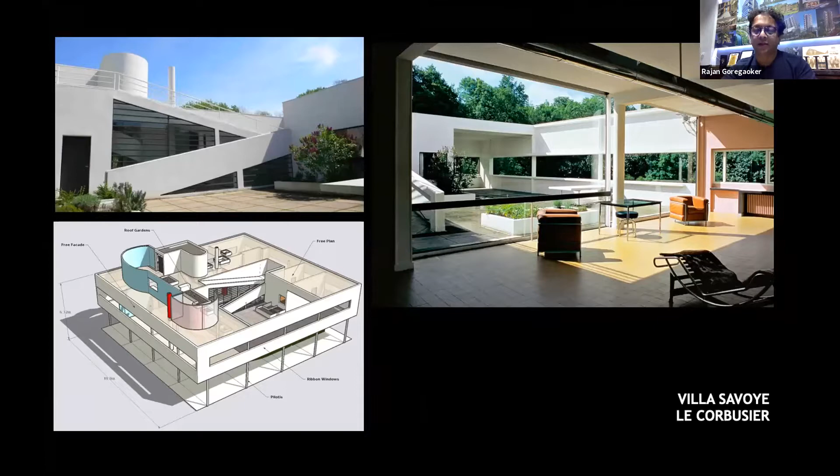So going ahead, after seeing this kind of work, I'm sure everybody, all architects, were inspired to do great stuff. We also have used some kind of ideas and thoughts in our houses, and I'd like to share them with you with some of our work.

Now I'd like to talk about transition of spaces. Transition of spaces is actually a concept which is not new. If you go down history, you'll always see a lot of old forts and Mughal architecture, or a lot of historical palaces which have courtyards and corridors, which play the part of creating a transition from one space to the other. I think that's done so that the entry and the destination create some kind of transition in between them.

We used this kind of idea in one of our projects, and I'd like to show you how we've done that. There was a plot which is around an acre in size, and we were permitted an FSI of only around 4,000 square feet.

So it was a small house, actually on the edge of a mountain, so you can see the valley beyond. Instead of just constructing a bungalow or villa, taking 10% of the area and just locating it at the edge of the plot, we thought, why not create the entire journey from the entrance to the destination, and create an experience while we do that, because we have so much space to do it.

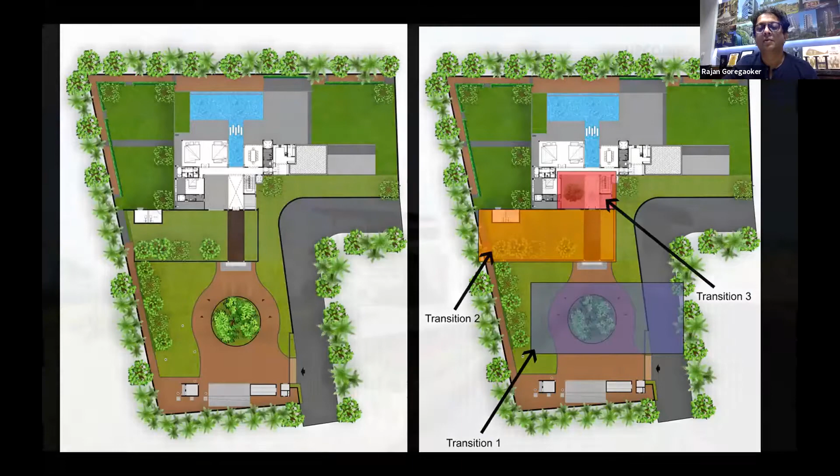This is what you see when you enter the house, when you're driving into the land, and when you see the house, but you don't really see the magnificent view which lies in store for you. What you actually just see is a screen wall, and you experience a space with a beautiful landscaped entry, but you don't see the view you're going to see from the living room. This gives you a sense of mystery and curiosity, which is another very important element in design - if you can create it, it really brings out the anticipation of what is ahead. So here you are.

From there, you move on and walk down a corridor. So what you actually entered from was a notional entry, not a real entry. But you walk over a corridor where you experience another landscape, another kind of light and shadow experience.

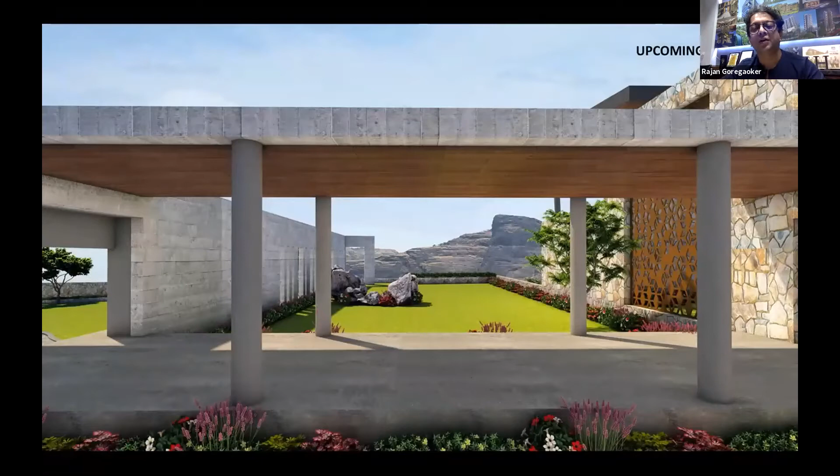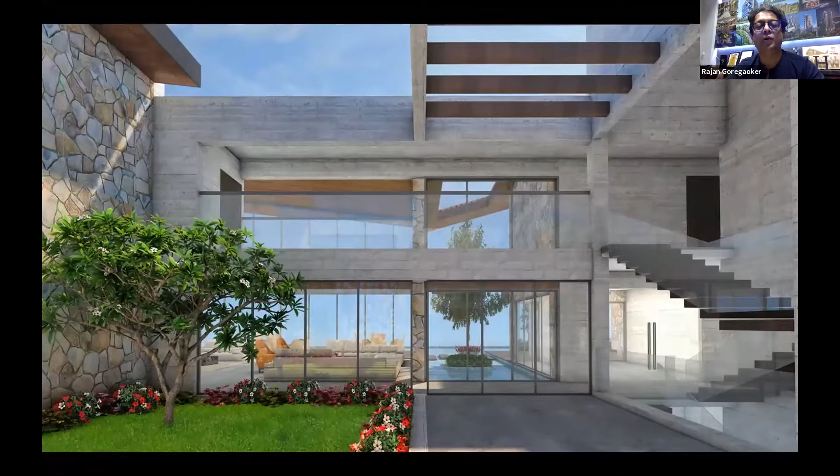A different kind of biophilia all around you. After you walk in and enter the main door, you enter another small courtyard enclosed by walls but with a skylight from the top, so you get natural light. Each space is actually a semi-outdoor space, and it closes in more and more as you reach your living room, preparing you for what is ahead.

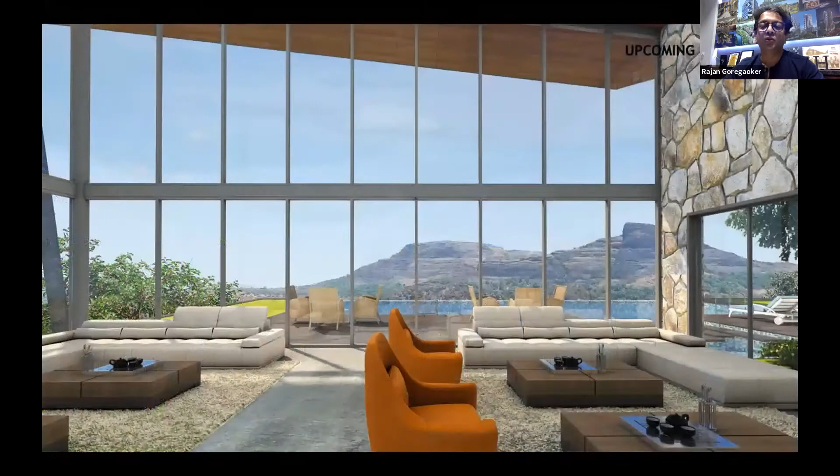So this is what you finally see when you reach the living room. Instead of making a house where you just open the door and go straight into the living room, we've created an experience right from the entrance to your destination.

I really like the Villa Savoye example that you used here—very influential building of the 1930s, and there's been a lot of imitation. People have tried to emulate that building all over. Phenomenal project—I think it set the trend for modern architecture after that, and it was just path-breaking. Absolutely, it was at the cusp of evolution at that time.

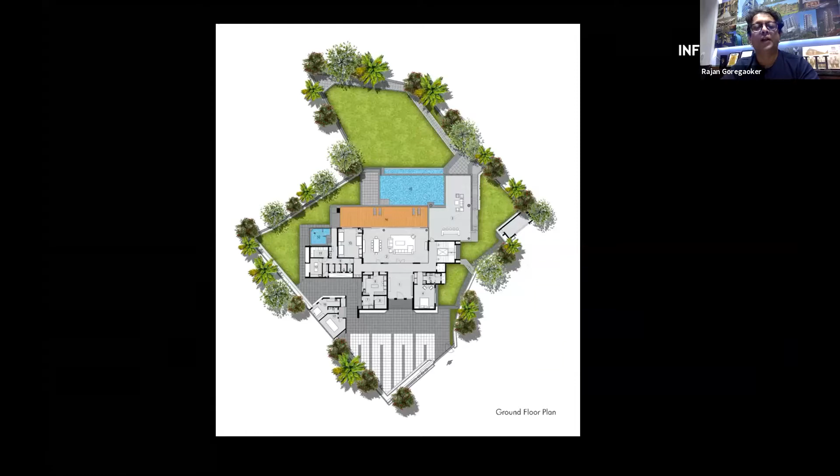The entrance here—you really can't tell what lies in store ahead. Using mystery and curiosity in design is very important. When you see the house from the front, you don't know what's in store; it's a pretty plain facade. As you walk into the first lobby, with the skylight on top, you can see in the background a water body, with the water touching the landscape behind.

And what we did was we made this entire place focused around the swimming pool. On one side, we've taken this large portal, creating this violation of the human scale. It's around 30 feet in height, and it envelopes the entire geometry of the house.

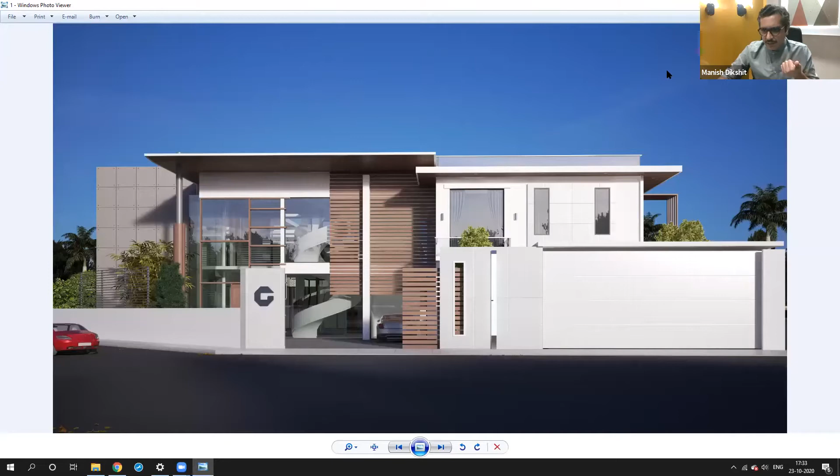So I hope my screen is seen now by everyone. Yes, all right. So this is one project which we designed in Dubai.

It's in the final stage of construction, pandemic delayed it right now. So the whole idea about this project is this is in a very upscale neighborhood of Dubai where you have all villas which are quite traditional in terms of Dubai standards, with an Islamic architectural influence in them.

One of the criteria given to us is we needed to use the color gray and a sandstone finish on the walls, which we tried to implement by blending it with the concept of the whole house, which was quite in the contemporary lines, managing the climatic condition of Dubai, which is very critical.

So the use of glass - I know Esra will be very happy when I'm talking about glass right now - but the use of glass in that right location with the northern light that we try to get inside the house ensures that we eliminate the use of too much artificial air conditioning and artificial support of your climatic condition inside the house. So that also is equally important when we try to design most of the building.

I think most of the architects here will also agree. Many times we tend to fail when it happens to be a project in a congested urban town like Bombay, because we don't have that flexibility when it comes to different directions of light that we can take inside our project.

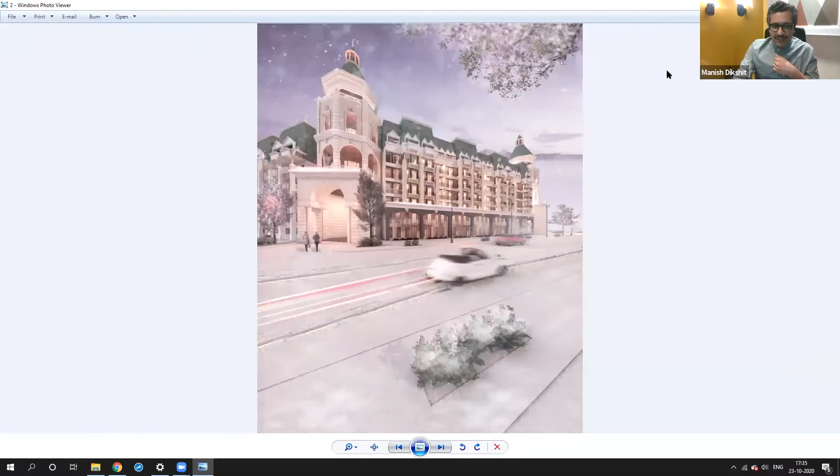This is a second project which we designed in Moscow. So again, completely drastically different from the earlier one, from that hot Dubai climatic condition to the extreme cold that we need to tolerate and bear. So here it was the other way around.

We needed to use maximum light and maximum heat, which needs to be penetrated inside the house. And another key feature here are the balconies.

Balconies also play a very important critical role because we need to understand the amount of dead weight that the snow creates on the balcony. So to ensure this snow does not cause unnecessary structural damage to the building, we need to ensure that the balconies are sufficiently covered so that direct snowfall is minimal in these kinds of scenarios.

Also, one key important factor is the roofing pattern and the shape of the roof. To understand the amount of snow that a place like Russia, Moscow here, gets throughout the year, we need to balance it out perfectly with the condition that you generally face.

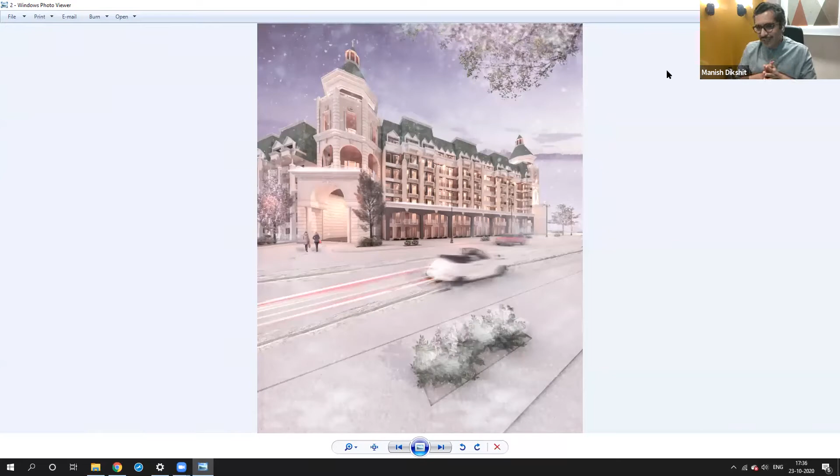The key element about this building is that it was Chola-inspired architecture. This is something we tried, contradicting what I said earlier about geographical location versus structure. This is the best example of that. It's located in a place called Matunga in Bombay, which is next to all the South Indian Dravidian temples, and the flower market around it.

So it had a lot of character in that vicinity. What we tried to do is let it merge with the surroundings rather than being an eyesore or just a structure standing as an uncomfortable view for people passing by. In fact, the good point was the next door structure was a temple itself, so right from the colors of this building, we tried to blend it with that, and yet it has got its own statement when you look at the building.

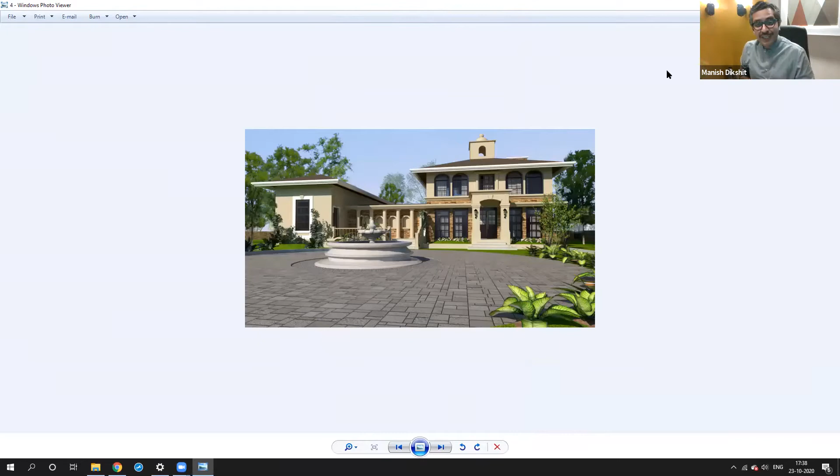This is again a very interesting project, now in the center of India. This is almost 150 kilometers from Jabalpur, almost the center of India you may call it. This belonged to a client of ours who is based in the US, and he stays almost 9 months of the year in India. So he wanted his house in India to feel more like how he would be in the US, adapting landscape elements for this project to handle the harsh summer months, which are very uncomfortable in this zone.

So we created in advance, before we started the structural work, pits around the whole project so that natural rainwater, which is minuscule, was being absorbed into the soil, and it gave rise to local flora around it. This helped us create all the greenery that you see here. Right now it's even much more than what you see in our 3D renders.

So the whole blending and styling of the structure went with the whole concept of what the client wanted, because frankly there was no specific geographical influence in this, but it also showed the climatic condition which we needed, combined with the style the client wanted.

Now I'm going into an interior part of a project. This was a recently completed project. Now, why is this important to understand the geography of a project? We all will agree that most buildings and structures coming up today have got their own style. One of our projects also has something like that.

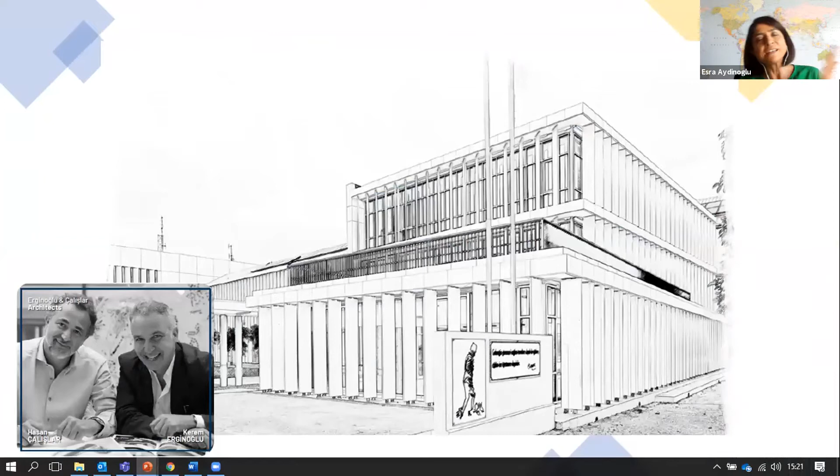We believe that every project has its own story, starts with a dream, touches lives, makes life easier. Different dreams, different perspectives, different needs, delicacy in detail, wisdom from the past, and vision from the future. All of them form an integrity, and each story comes to life.

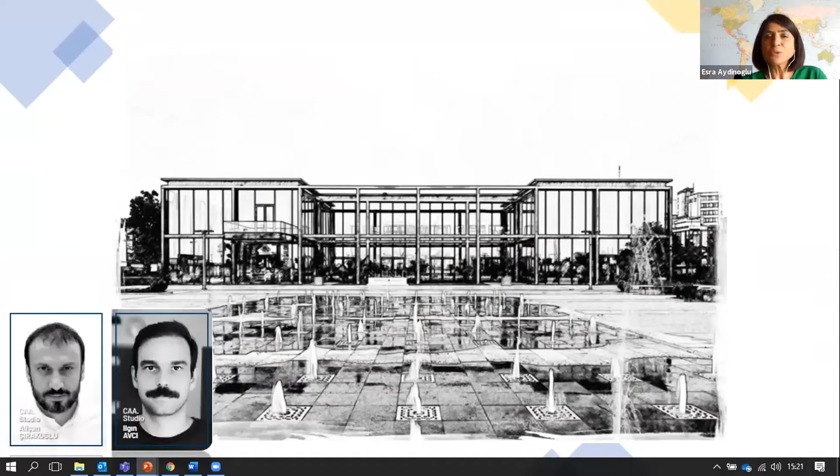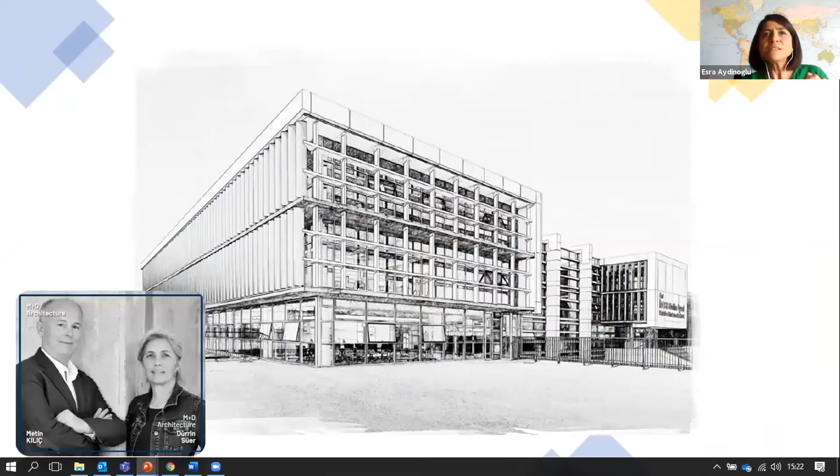We are very grateful to all the architects who are creating stories of living spaces where people live happily, healthily, and safely. In order to help them create new stories, we are offering glass consultancy. We handle the projects from design to the building's opening stage, recommending not only the right glass products according to climate and function of the building, but also tips for optimum budgeting.

At Şişecam Flat Glass, we have solutions for all needs of the projects and unlimited creativity of architects for reshaping the architecture after COVID-19. So please do not hesitate to ask any questions either in Q&A or through our email account.

That was really nicely put together, Esra. And glass, I mean, phenomenal material. I really love working with glass, and especially now you need glass more and more because you're stuck in your matchboxes, and the border that holds you back is glass. But yes, you're completely right. Yeah, no, wonderful material. Love working with glass.

And now they're integrating so many technologies into glass itself, the introduction of photovoltaics into the glass panels. Are you doing any of that? Yes, of course. We are also having glass for the photovoltaic sector, so it's a part of our business. We have some examples already in Turkey.

You can check our reference projects from our website. We have a wonderful building in Bursa. It is for one of the energy companies. They use photovoltaic glass on the facade, on the south and west facade, as part of the design.

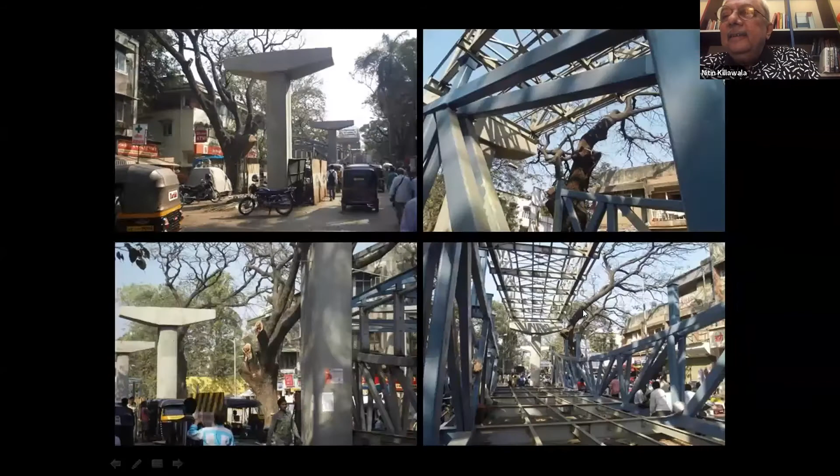Few years back, we have seen the onslaught of skywalks. In the pretext of giving a good design or good urban plan to separate pedestrians from vehicular traffic, what they've actually done is ruin some of the very beautiful streets or even arterial roads of Bombay. This is one of those skywalks in Vile Parle, which was under construction.

This is what it is now, the same skywalk today, where even the government and those in authority said they are not going to cut any trees, just trim them, as if trimming won't kill the tree but will only cut its limbs or leg. And the tragedy is that this is shut now.

Out of 70 skywalks, 50 skywalks are shut, and there is no accountability. Now just look at, when we talk of design, these are the spaces, these are the huge projects which are in government domain, where we have not even made a dent.

I think you also mentioned some of the subjects students choose these days, but that's what they've been saying. So how do we, as a fraternity, impress upon the government? Like in Delhi, there was a Delhi Urban Art Commission, so there's some kind of control. Why can't we have an urban development ministry, urban development department, a very strong department reporting to the chief minister? Why can't we have an urban design department where we can actually throw these ideas? There is no dearth of talent in Bombay, we can do that.